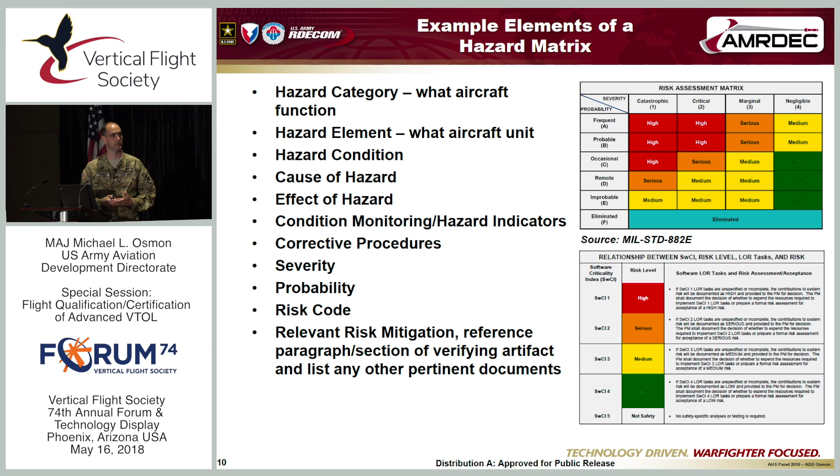Just wanted to include a risk assessment example. To me, the one difference: often through manned platform risk assessment, you end up with an initial severity category. So that's the highest likelihood of death to occupants or severe injury. There's a dollar threshold as well for Cat 1, above $10 million. So typically if there's a person on board, it gets really difficult to mitigate that to actually reduce the severity if there is an incident. But with unmanned aircraft, it's a little more likely or easier to mitigate that down to a reduced severity if there is an incident.

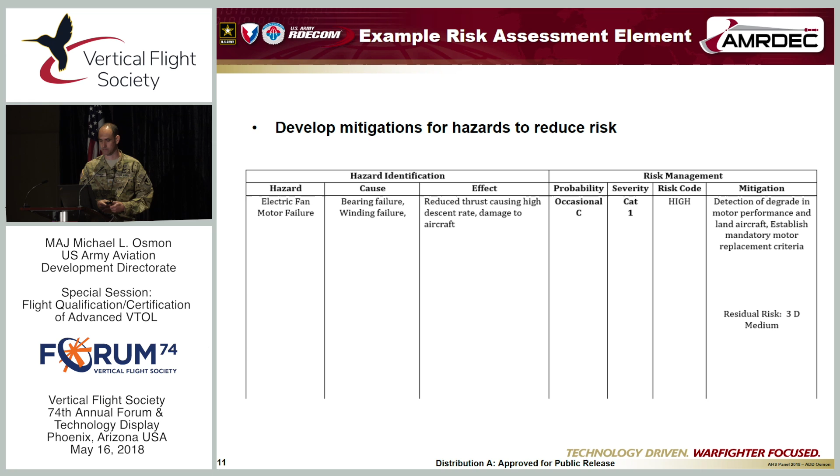Some of this was pulled out from our local test planning handbooks. So I just want to highlight the difference between a fundamental, more system-based, total system path towards certification and something more directly towards a flight test activity, a flight test airworthiness release. So a test airworthiness release may be essential to enable the flight test activity.

So it's going to reference things like a flight test plan, which gets into the detail of test, method of test, which may be part of the specific test procedures. But what is the scope? What are the assets involved? And how are you going to accomplish that test? It identifies the testing personnel, any specific flight envelope limitations that may be beyond the operator handbook or other existing limitations, or it may be smaller based on the scope of the test.

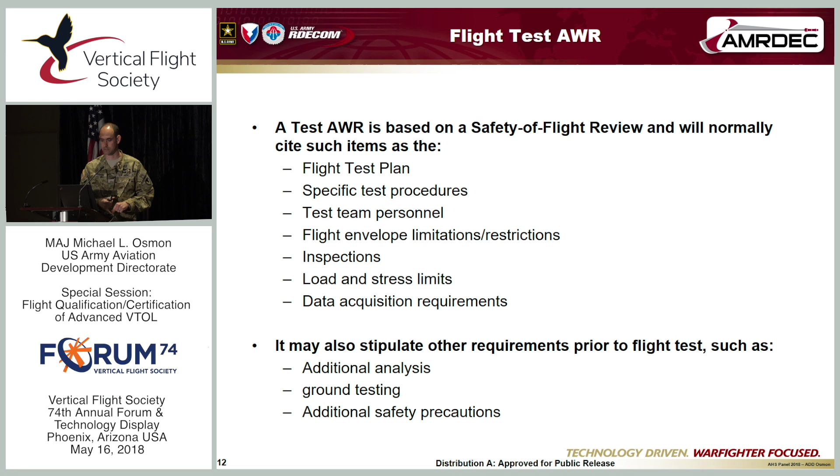It may identify special inspections, load and stress limits, and it may also stipulate other requirements prior to flight tests in order to actually provide some of the necessary substantiation, again, guaranteeing safety.

So I just want to highlight a couple things out of the DODI as well, that all of those MRTFBs are authorized to use resources by commercial entities. So if you are a commercial entity that has no interest in pairing with the government to do a flight test, to provide us information and allow us opportunity to provide oversight and accomplish things together, you can still approach any of these facilities on your own and offer to buy the range space. They'll still coordinate with you.

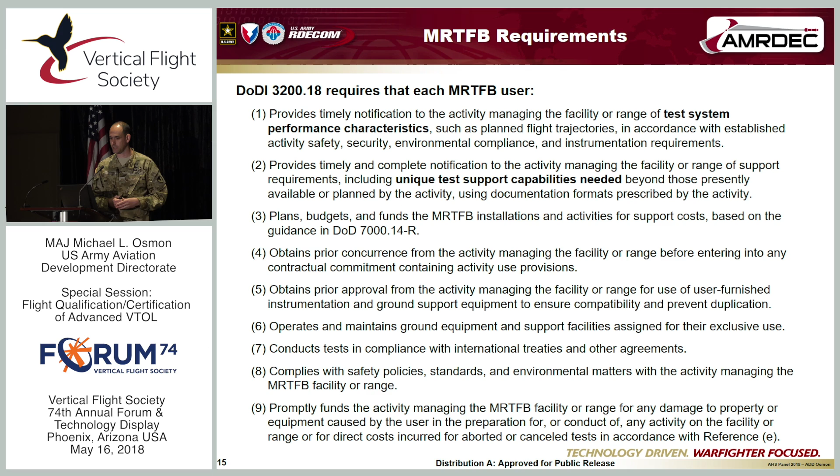In the interest of time, I'll just move to this is what you'd be signing up for. Each MRTFB user is still going to have to provide information to the test facilities in order to confirm that you're going to be able to conduct things safely and within the restrictions that they have in place. It's going to require identification of any unique test support capabilities.

Of course, paying for the facilities, that's one of the benefits of government sponsorship. You would get the special government rate, as it were, to conduct that, and or in that test agreement, the government may end up paying part of that bill. So again, these are there for future reference.

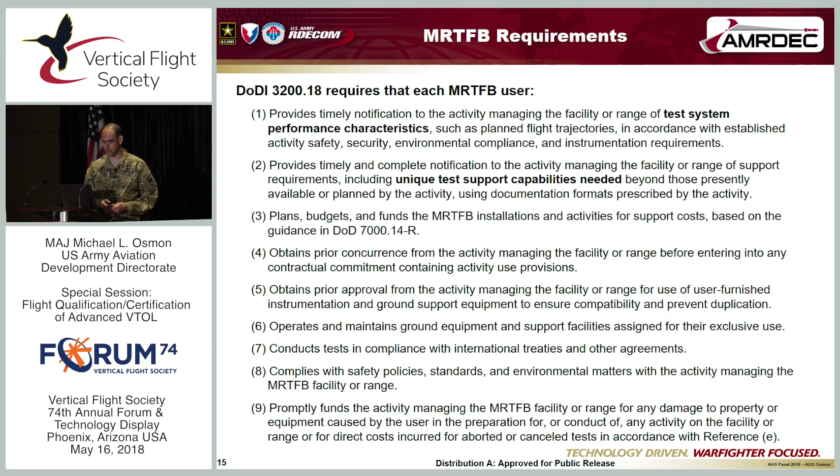For example, at Yuma Proving Ground, if you show up there, assuming an unmanned system, they have their SOP that dictates all operations on the ranges, and as part of that, they have their specific UAS operations on YPG ranges. So you'd have to comply with all of that. They have a safety assessment which gets into UAS-specific hazards over time and experience that they have there, and there are standard mitigations addressing all those standard hazard areas.

The safety assessment includes the background information on the UAS itself, talking through those potential causes of vehicle loss of control, common safeguards, emergency procedures, and accounting for the possibility of any mid-air collision hazards either on or off the range. Payloads we didn't talk about very much. A lot of Army UAS have specific payloads that emit things, so that's also a part of test planning and risk mitigation.

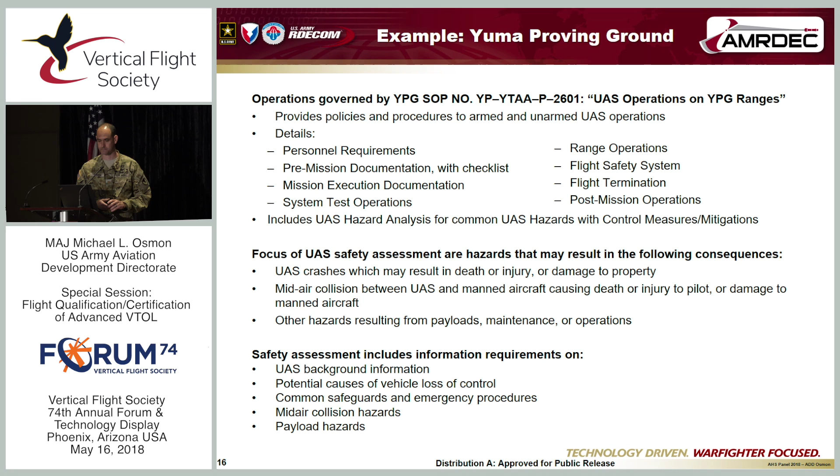That's the final slide. I added some other backup slides, assuming that these will make their way out. You can reference them in the future if desired. Otherwise, I'll be followed by Dave. Thank you.

All right. Our next speaker will be David Stephan. And I will mention that I'm reading the bios for a good reason. Part of that is that I think you need to understand the expertise or the background of our speakers, because that adds validity to what they're saying. And for future reference, if you do need to contact them, you need to know their background. So I'm trying to keep it as short as I can, but make sure you understand who we have on the panel and their subject area.

Dave is currently the Associate Director for Technology, responsible for all functional engineering within the Army Aviation Engineering Directorate. He previously served as the Acting Director for the Aviation Engineering Directorate on two separate occasions. In addition to this, he's had positions of Tech Director, Apache Division Chief, Armed Reconnaissance Helicopter Branch Chief, Apache Team Lead, and Apache Systems Engineer.

He also supported the PEO, which is a Program Executive Office. That's what I forgot. I've been retired too long.

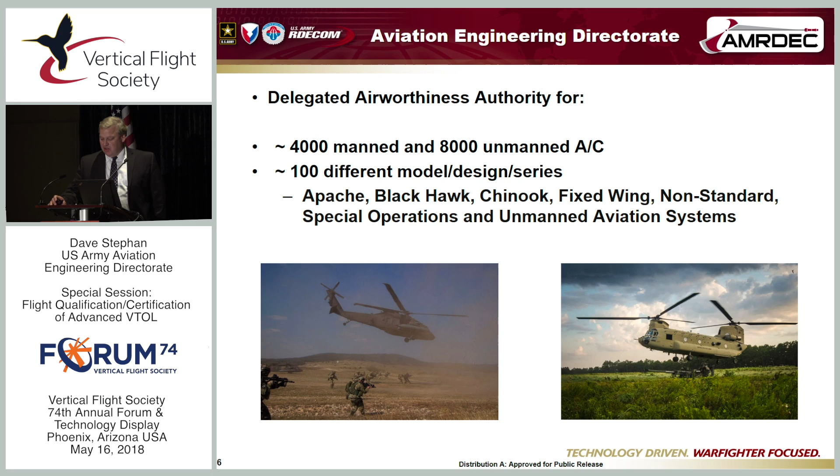So as I said, we're the delegated Airworthiness Authority for all fielded systems. That includes all the major weapon systems that the Army has, including the systems Apache, Black Hawk, Chinook, and also some special operations aircraft. We also manage the airworthiness for both the MH-60 and the MH-47 fleet. The thing I'm going to talk about today, though, is mainly about the airworthiness piece supporting unmanned systems.

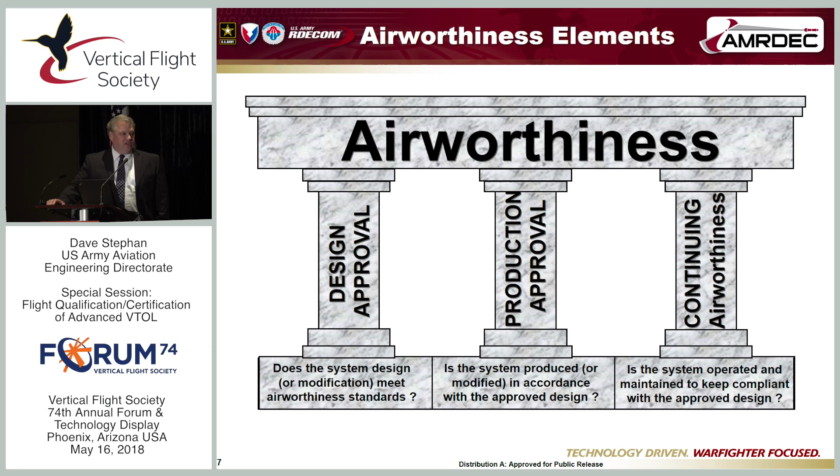But the other piece that's part of airworthiness is the aircraft that's going to be produced in accordance with that plan after we've gone through testing. Is it the same as what was tested? And that's led to some problems recently and throughout history because a lot of times the production aircraft don't seem to match exactly what was originally tested. And then the final piece is the continuing airworthiness piece, the maintenance manuals, all the inspection intervals, everything that needs to be done, including training of the maintainers.

So within the Army, this is the standard airworthiness process. This is both for manned and unmanned platforms, but we don't do anything without funding from a program office. We don't go out and look for business. In fact, we've had people contact us and ask us for an airworthiness qualification plan for a system they're trying to sell to a foreign government that's not in the current U.S. Army fleet, or try to get ahead of the game before the Army comes out with a requirement and they want to know what the requirements are going to be.

We're not allowed to do any of that work without support from a program office, and they have to have a validated requirement. So what we do is we get that requirement from the program office, we develop an airworthiness qualification plan, and we coordinate that and give that to an original equipment manufacturer, and they develop an AQS. Some people say that's backwards. You guys should put the AQS out and they develop a plan, but this is the Army's regulated process. And we'll negotiate with the OEM to come up with that airworthiness qualification specification that they're going to go do the testing against.

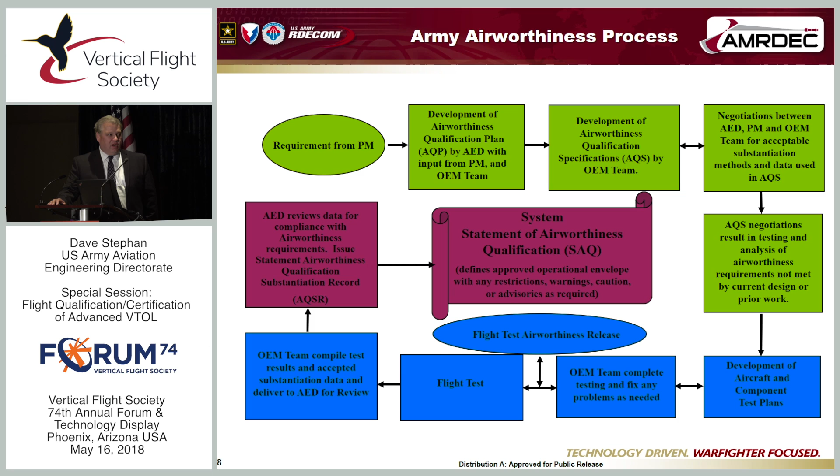They'll develop all the components and component test plans, subsystem plans, system plans, complete a lot of that work historically directly, and then write the reports, submit that to us for approval, and in many instances in the past we would throw it back and say, well, you didn't collect what we wanted. That's not how we have to do business in the future. So one of the things I'm going to talk about at the end is a little bit of where we're going on future vertical lift as far as airworthiness plans and what the current status of some updates are for some of our requirements documents.

So the purpose of this briefing, as I talked, was some of the UAS pieces and what we currently do and what we don't do as far as airworthiness. As you see, this is a kind of a graphical description of the different categories, level 1, 2, and 3, for each of our systems.

Now, level 1 is essentially the same as a manned platform. We would require the same effort that we would for any, say, FAR Part 23 aircraft. So the Army only has right now in their programs of record just fixed wing platforms. So that's why it's Part 23, but it would follow the same process for a Part 27 if it was a rotary winged aircraft.

But basically, what we require is if you're gonna do something significant, such as a weaponization of a platform, you need to have at least airworthiness qualification level 2. That's been our policy for 2 years. So these aircraft have been out there for many, many years, since early in 2000s to support the war on terror and different efforts, but we never got anything into regulation until 2016. So we've been working off of some internal documents.

And when we put these out, you'll see that some of the requirements are greater than what the aircraft meet for any level. So, anyway, essentially what we do is level 2 and level 3 are risk-based approaches that the Army follows. Level 2 means you've got some level of data, and what we have on our Gray Eagle platform is we have qualified the kill chain from the sensor to the data transfer to make sure that if anything goes to another platform that isn't verified, it all meets the Army certification requirements.

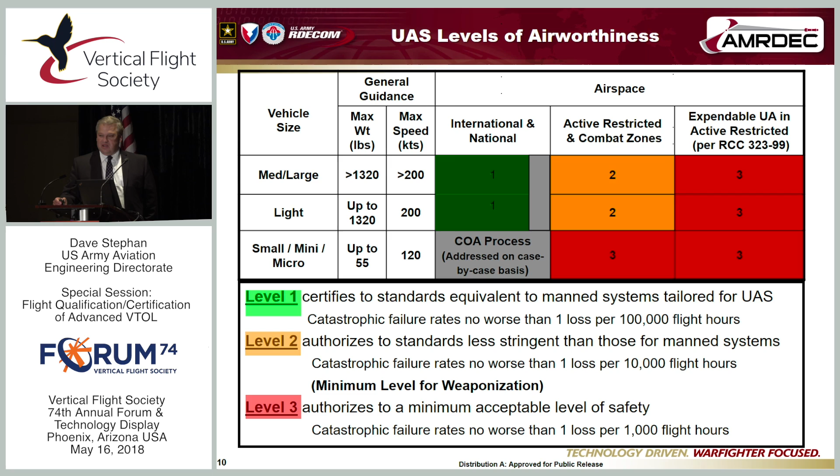And level 3, as I mentioned, essentially they range. So Gray Eagle has done a lot of work. We've had a lot of systems that have done a lot of qualification work, but they don't meet all the requirements. Essentially, these are treated as expendable aircraft, and that's hard to do for a $10 million aircraft. So when you don't design things with airworthiness in mind because of necessity, then you have to live with the details.

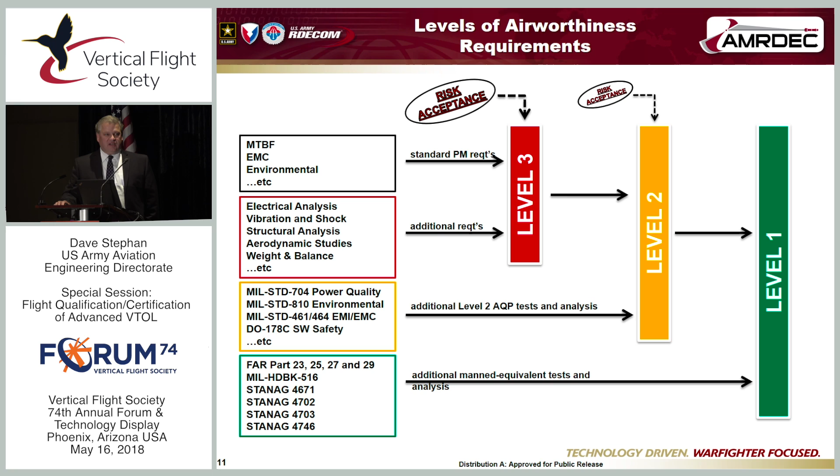So from a level of airworthiness requirement, this is just a graphical depiction of some of our requirements from a level 3, and it just shows that we get minimal data for a level 3 AWR, and it grows rapidly until you get to the level 1 manned requirement. And when we go forward with our new future UAS system, it's expected that it's going to be a level 1 requirement. It's going to have to meet the manned requirements.

So, as I mentioned, some of the current UASs that we have, they were developed as programs of need to meet some capability that the Army had in the field. So they weren't designed with airworthiness in mind, and we had to figure out how we would support them. So you'll see some of the restrictions that we have in most of our releases that restrict flight over populated areas. We limit lots of things from an exposure standpoint.

And we put a lot of cautions, notes, warnings about the systems that are on the aircraft that don't meet those airworthiness requirements. As Mike mentioned earlier, each of our systems has gone through a safety hazard review, and we've reviewed all those and included any limitations into our airworthiness releases that we provide to our field.

As I mentioned, we'll never get there with some of our current fleet as far as a certification level. They weren't designed with that as part of their original design. They're doing the best they can, but that's as good as they're going to get. And they meet the intent, which was to put a capability in a tactical environment that meets the Army's needs.

So the problem came when we decided to bring some of those aircraft back here and try to do training here in the States, and then try to figure out how we do that with an unqualified system. So that's where all the hazard analysis came into a lot of detailed reviews. And the way we manage this in order to fly these aircraft in the United States right now is through a casualty expectation model. So we review the current reliability data that we have on each of these platforms, compare that to the planned test flight route and the population densities in the areas that we're trying to fly.

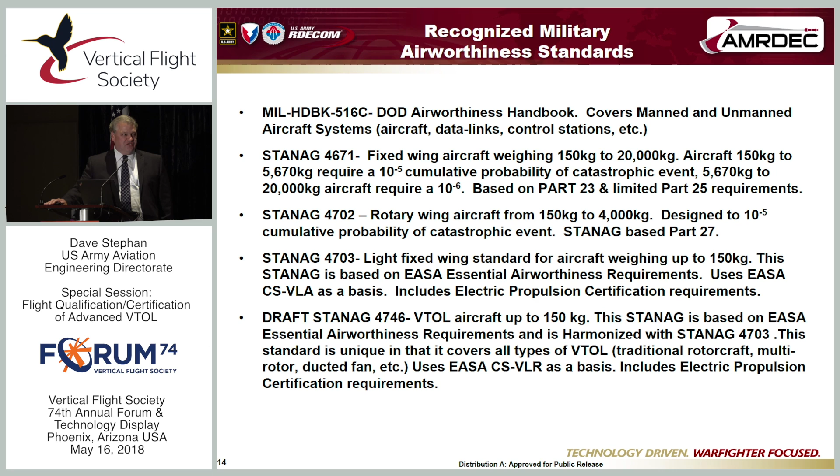There's been a lot of effort put into this area, but we know that industry is going faster than we are, and we're going to rely on you to help us define some of those standards to help qualify these new systems, because I know when the Army sees the capability that is being developed across the commercial industry, we're going to need and want to use that capability in ways you probably never imagined, but will certainly help us as a nation. So that's really the only information I've got on the UAS piece. Just try to get you up to speed on where we have been and where we're going.

From a future vertical lift standpoint, I want you to know that we're currently working on some new standards that are similar to a MIL-HDBK-516. So it's going to contain all of our rotary wing standards. It's called an AMACC, Army Military Airworthiness Certification Criteria. So if you're tracking what the Europeans have done, theirs are the EMACCs. So we just kind of copied off of that, but it's based on 516 that the Air Force has done. So we're developing that right now.

And we've learned a lot through some of the efforts that have been ongoing with the JMR technology demonstrators and with both the Bell aircraft and the Sikorsky Boeing Defiant aircraft too. So we have some folks that are working directly with those teams, specifically people on site witnessing flight tests, participating. But the biggest thing that we've done on that effort is because the Army only funded between 25 and 30% of those aircraft efforts, we've allowed both those vendors to use their own internal processes for airworthiness. They're flying under experimental flight certificates. They're going to be flying in the Sikorsky Boeing's case. And we're gaining confidence in what they've been doing because they've done it many times in the commercial world.

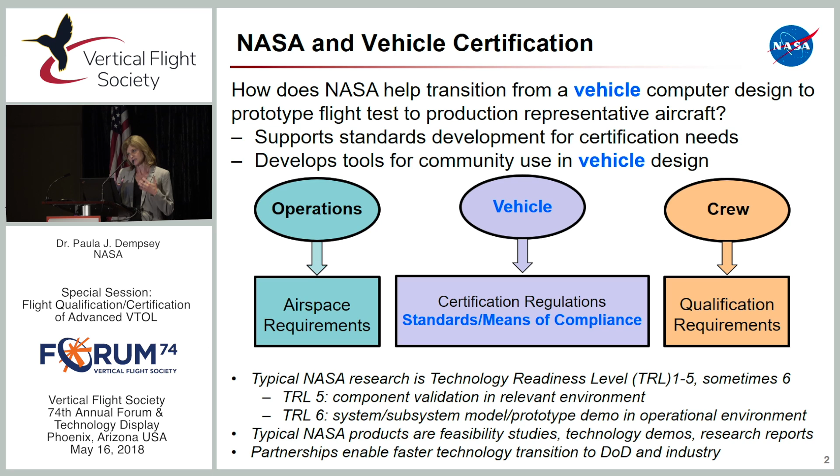So I'm going to just give you a little bit of background on the Revolutionary Vertical Lift Technology Project. The goal is to develop and validate tools, technologies, and concepts to overcome key barriers for vertical lift vehicles. Our scope is very broad. We look at technologies that address noise, speed, mobility, payload, efficiency, environment, and safety, in both conventional and non-conventional vertical lift configurations. And so I'm going to highlight some areas that we support in vehicle certification: acoustics, crashworthiness, electric propulsion, and conceptual design.

So first let me talk a little about acoustics. The researchers in our project develop and validate tools for noise modeling and annoyance modeling. So one area is they perform psychoacoustic tests and assessments for human community response, trying to establish annoyance metrics. What we find is it's not just loudness. There's a lot of other components to the annoyance to different noise.

And if you look at that photo on the left-hand side, it shows an exterior effects room. This facility is located at NASA Langley, and they have different sounds from different vehicles that they expose human test subjects to, and they get them to assess their level of annoyance. In addition to that, the researchers perform source noise modeling and tool validation, both in laboratory measurements of propellers and electric motors, and also field tests, where we fly aircraft and are able to take measurements on the ground.

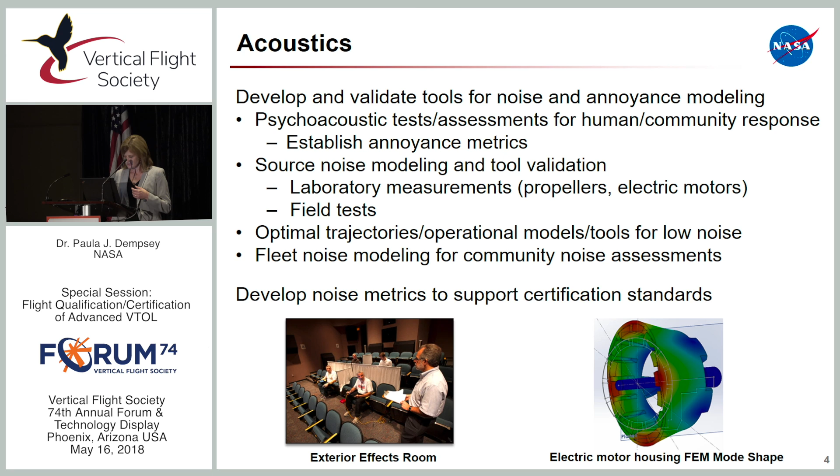Okay, the other area is in crashworthiness and survivability. I don't know if you had the opportunity, but there was a crash safety session yesterday, and there was a presentation that I would recommend if you're interested in this area to get from your proceedings.

It included looking at bird impact testing on rotor blades. There's been a lot of work done to the point that we have an artificial bird that's accepted for certification and testing. It feeds into SAE standard G28, simulants for impact and ingestion testing. And if you look at the bottom, there's kind of a politically correct picture of the bird impact testing.

A lot of our folks participate in standards committees and other type of committees. One area is the Aviation Rulemaking and Advisory Committee for Transport Aircraft Crashworthiness and Ditching Working Group. And what that working group does, it provides recommendations to the FAA for transport airframe level crash and ditching requirements, and it feeds Part 27.562, Emergency Landing Dynamic Conditions.

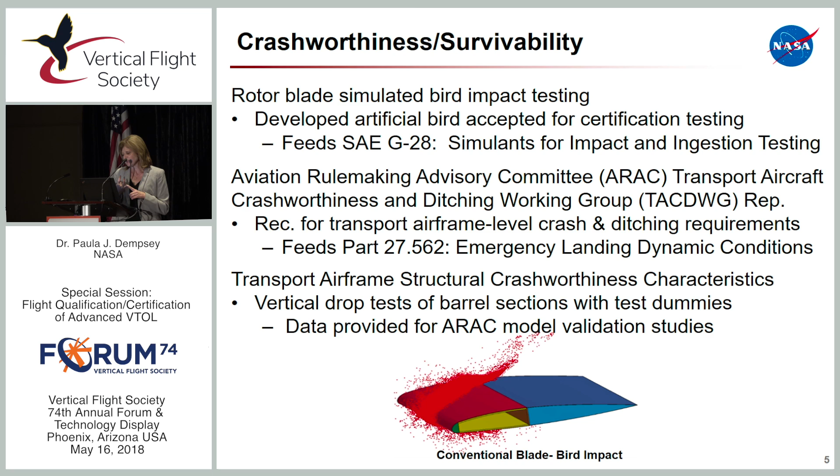Okay, the other area is developing crashworthiness characteristics for airframes. There's vertical drop tests of barrel sections with test dummies that are performed at NASA Langley. They have a large gantry. It's called the Landing Impact Research Facility, where they can take a fuselage and put some test dummies in there and instrument them and gather a lot of the information. And this data is provided for the Aviation Rulemaking Advisory Committee to validate models.

Okay, a new area that we're starting to work in is electro propulsion. And electro propulsion for vertical lift vehicles, we're trying to understand what kind of information would be required to certify these types of systems. And we have been generously given some of these standards from the FAA.

We have some folks at NASA Glenn that are looking at NPSS, which is a propulsion software that's used for engines, and they're providing new modules to look at electric components and electrified aircraft.

And then another project is the Flight Demonstration and Capabilities Project. This is another project under the NASA Aeronautics and Research Mission Directorate. Many of you have probably seen articles or other information on the X-57 Maxwell. That's where this project resides.

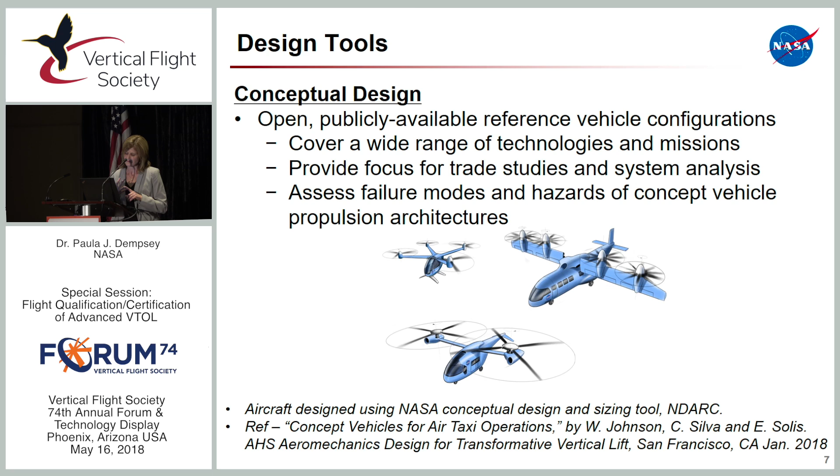Okay, the last thing that Rick asked me to do was to provide points of contact for the different areas. So the different parts of the certification that I presented, or the technology that feeds into the different certification standards for acoustics and crashworthiness and electric propulsion, and also conceptual design. Susan Gordon is the point of contact, and she's the project manager for the Revolutionary Vertical Lift Technology Project. And this is her email.

And for the X-57 project and other flight tests that are performed at NASA Armstrong Flight Research Center, it's Brent Cobleigh. He's the project manager for Flight Demonstrations and Capabilities Project. And that's all I have.

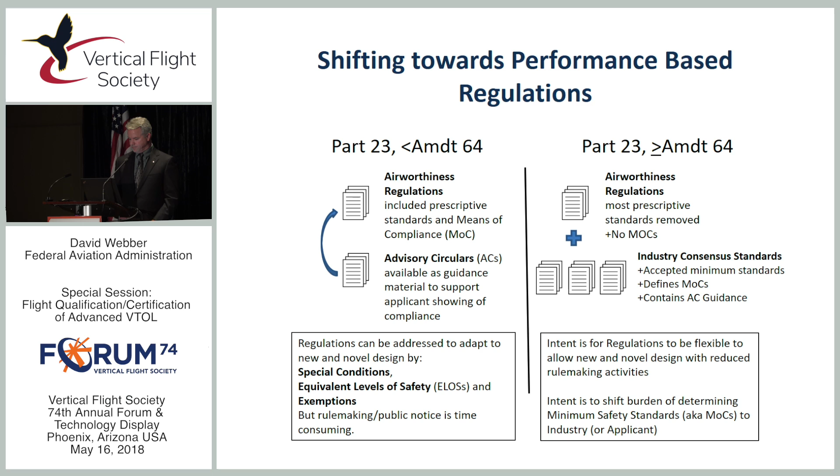And once again, the hope of the FAA, the strategic hope, is that industry moves faster than the government will move, faster than the Army moves. We know that technology is always going to move faster. So we would love to shift the burden and the agility of coming up with those new standards to industry, because we know in the rulemaking process we're not quick enough, and we don't want to stifle innovation. So what we want is FAA accepted industry standards. We want the consensus standards to be worked out, and the FAA will simply accept those, and we can use those underneath our performance-based rules to give us the safety assurance that we require.

And the good news is we have the regulatory options. But it's going to take some critical thinking on the parts of both us and potential applicants as to what the best path to take is. So we can add special conditions to address powered lift aspects of designs if we go under Part 23, or you can use 21.17(b) and use airworthiness criteria developed specifically for your aircraft. But the end goal is the same. Basically, we have a thing called the risk continuum, and a critical part is to first approach the FAA and come to an agreement of where your aircraft falls on this.

There's a line there that's basically intended to show the societally accepted risk, and you can see up at the top you've got your Part 25 transport airplane, and at the very bottom you've got your radio-controlled airplane and small UAS. So somewhere in between that is where this new on-demand mobility eVTOL aircraft goes, and we have yet to come to a solid agreement on where that is.

And I just want everybody to understand that we don't know where that goes. We need your help in figuring that out. And that's it for me.

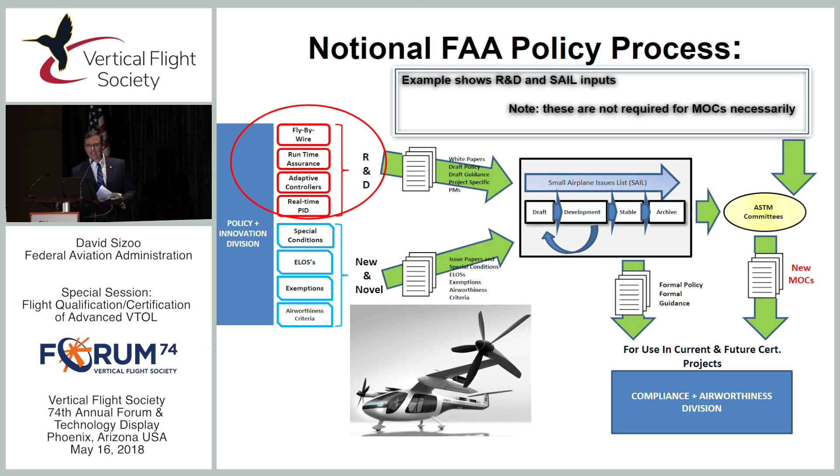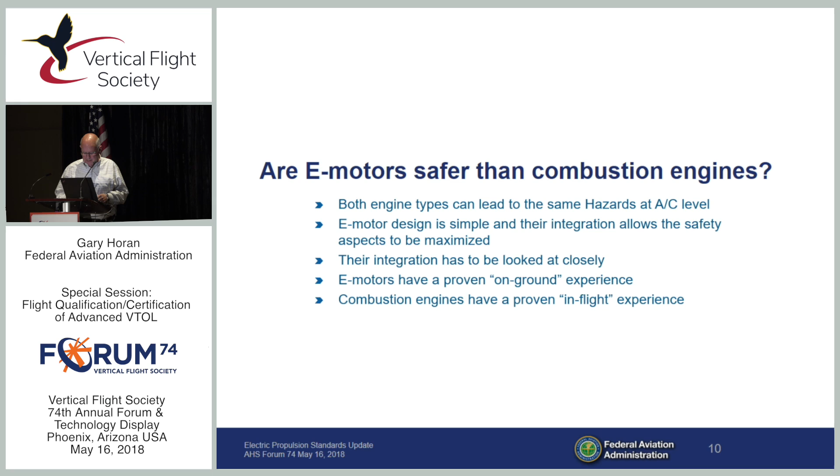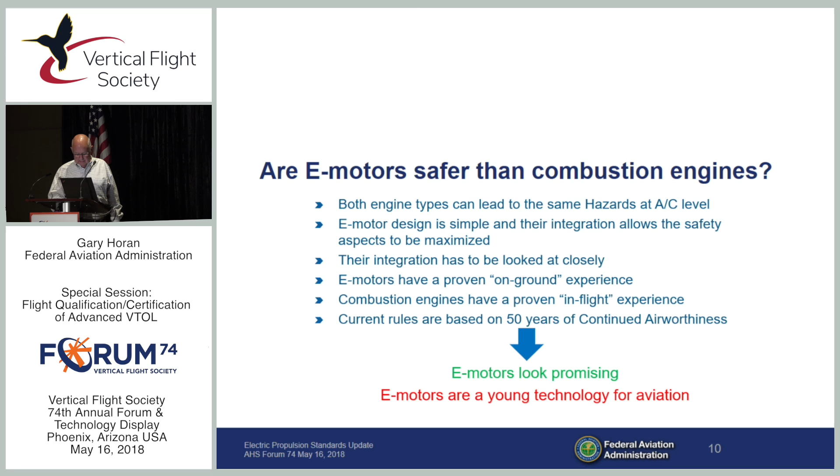The current rules are also, and this is one of the problems, based on 50 years of continued airworthiness experience. And it's hard to just set that aside and say, okay, we're going to start up with electric motors, and it'll be okay, don't worry about it. So what do we have to do about that? Well, number one, we conclude that E-motors look very promising in terms of reliability. And E-motors are a young technology for aviation, and those are kind of pros and cons wrapped up in the same bow. And I believe that's it.